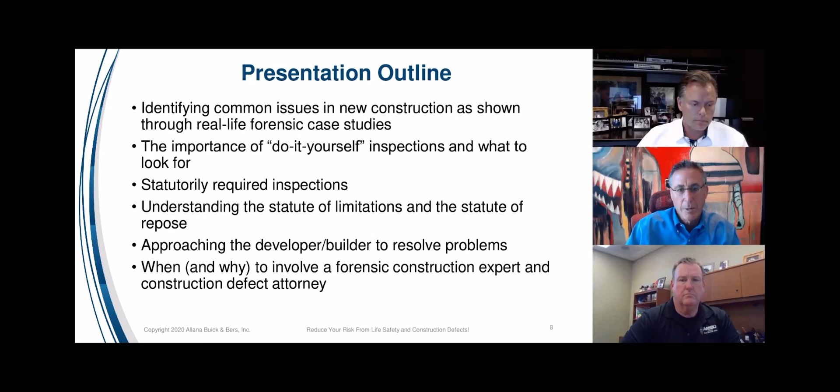Then we're going to talk a little bit about the statutorily required inspections in Arizona, and then also talk about the timeframes, statute of limitations, and statute of repose, the absolute cutoffs you have to bring claims if you find construction defects that develop, how to best approach developers or builders to resolve problems, and when is the best time in this cycle to involve someone like Gene or someone like our firm. So that's what we'll cover today.

Obviously it's taxpayers' money, and if these defects aren't addressed within the timeframes that you need to bring a claim, then you have a real potential of getting stuck with ongoing maintenance costs that you shouldn't have, and really make the project not as successful as it should have been. We'll talk a little bit about the 1-year express warranty that most contractors give, sometimes 2 years in their contract. And we'll also talk about the fact that in Arizona, you have up to 8 years to bring a claim for specific construction issues.

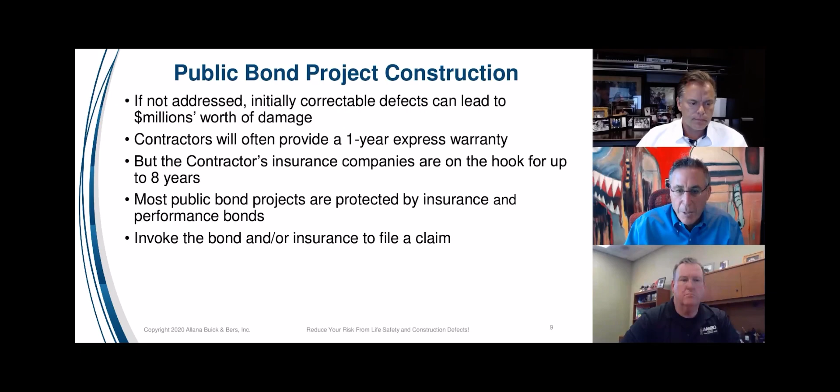And we'll also talk about the fact that most of these projects are covered by insurance and performance bonds, and what that covers and how you can bring claims to trigger that coverage. Because a lot of these guys have already taken their profit off the project, and if you're coming back 2 or 3 or 5 years later, where does the money come to fund these repairs? And often it comes from insurance products.

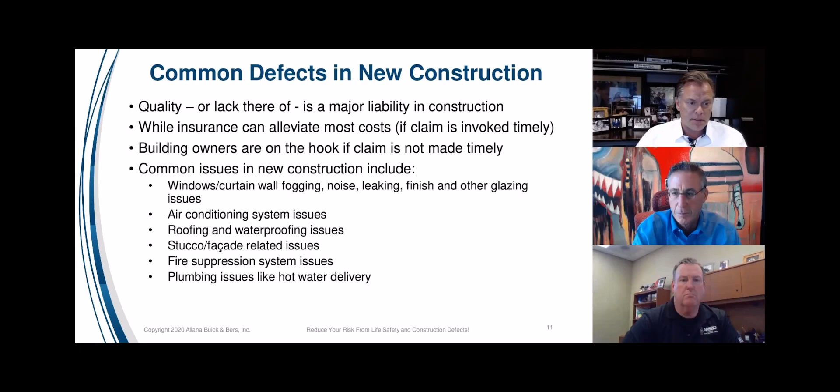The building is 3 stories on grade, slightly on a hill, with low slope roofing and HVAC equipment. The cladding consisted of stucco, with some ornamental tile work at the entry, plus curtain walls and storefront window assemblies. There's also a split slab waterproofing system—some courtyards on the building had topping slabs protecting waterproofing that also leaked.

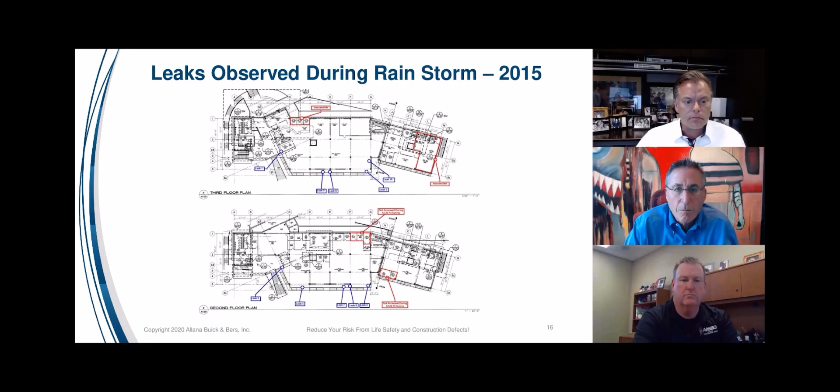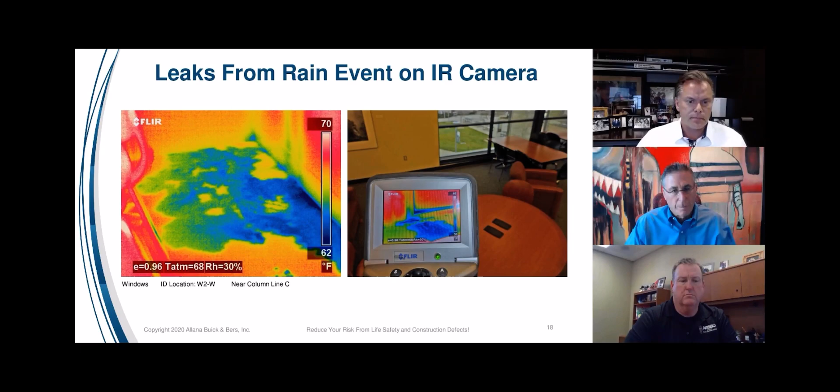And so what we have here is an infrared camera, and we took snapshots with the infrared camera to show the extent of water intrusion. And if you look to the left, you could see the blue outline, and that blue is a waterlogged, soaked carpet. And you could see that there's just a ton of water coming into the interior. And it's intruding upon the tables where the students are trying to study.

Another little tool or trick that we use to help show the water is using litmus paper. We all used that once upon a time in our chemistry class, and it changes color. And so when it gets wet, it turns a violet or a purple color. Of course, the maintenance staff had to take out their caution signs to point out that there's wet flooring and stay away from it. But you can see how wet the floor got.

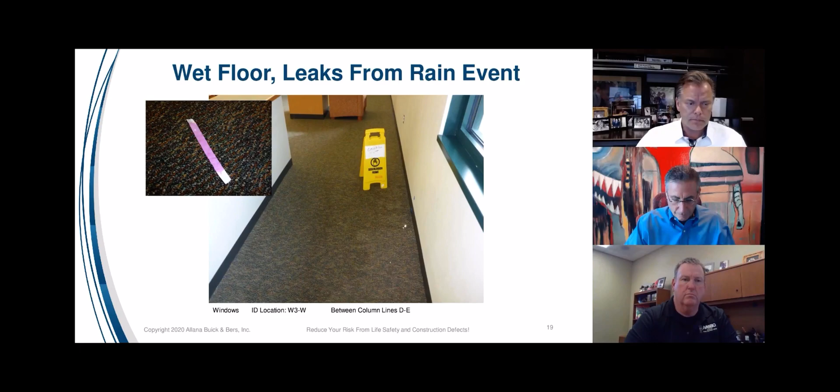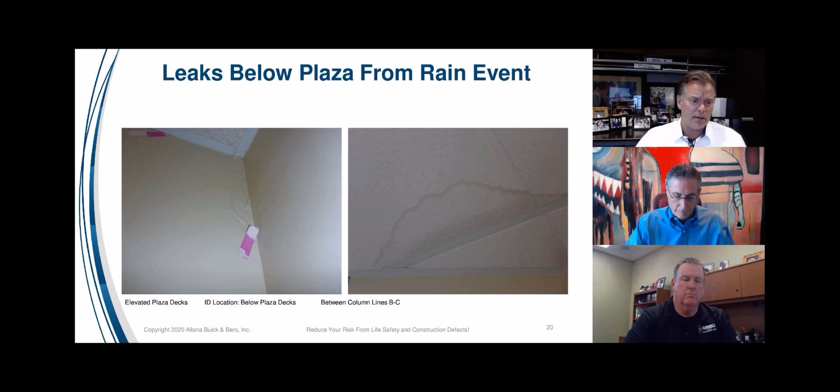Other defects that occurred as a result was damage to the paint and the drywall finishes. You could see the ceiling tiles, they were getting water stained. And this is a brand new building, very, very young, already experiencing such severe problems.

To help prove our case and to help the client during the litigation process, part of our protocol is actually to develop testing procedures and use equipment such as, in this case, a Retrotec negative air chamber and windblower system where we actually replicate negative pressure on the window system to do two things. One, to understand if the window assembly as installed was performing as designed and specified. And then two, we also wanted to replicate reported leakage.

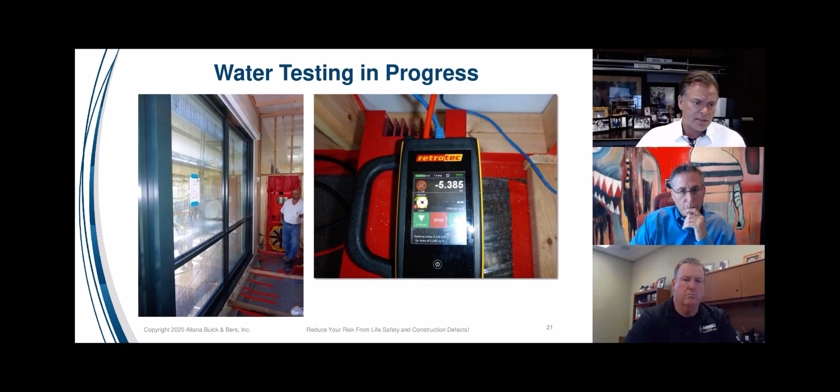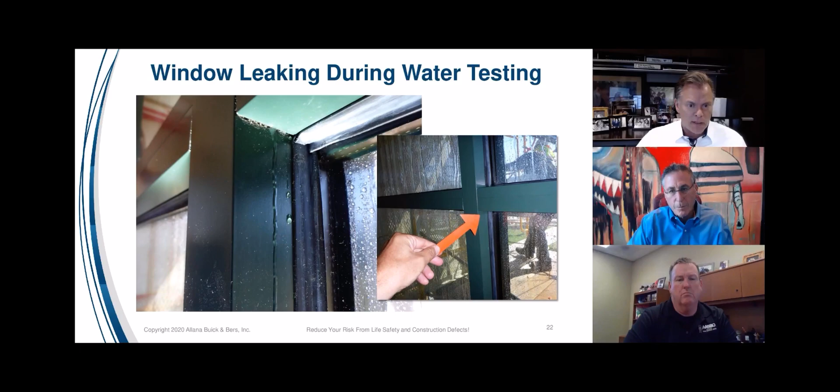And we've done both static test and then negative chamber testing. So with and without negative air chamber testing, and we got leaks in both instances. You could see here in the photos, we replicated leakage. You could see water streaming through the window, through the glazing pockets, through the framing members.

And I won't recite every bit of data, but we did create some exhaustive testing tables to help show the other side, the defense experts, what the results were when we tested it. Was it a window issue? Was there historical staining, whatnot? And what the results of the testing were.

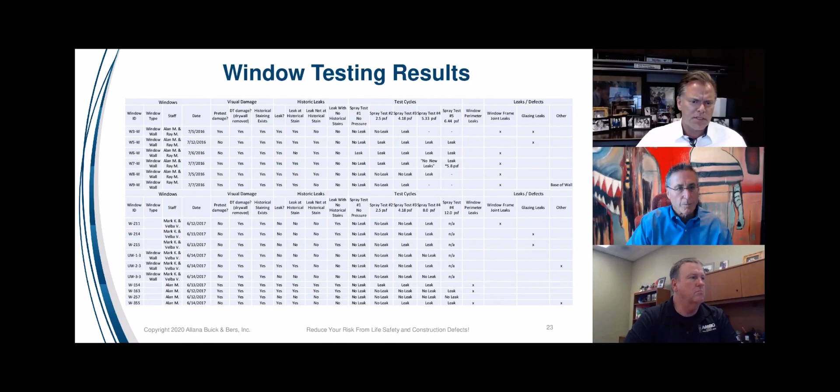In addition to the spray testing, we oftentimes complement the spray testing with some destructive testing. So basically what we do, like doctors, we perform biopsies on a building. And the purpose of that is to understand what the underlying condition of the building components are. How bad is the damage? What can we expect? Are there other potential problems underneath that we might miss otherwise without performing it?

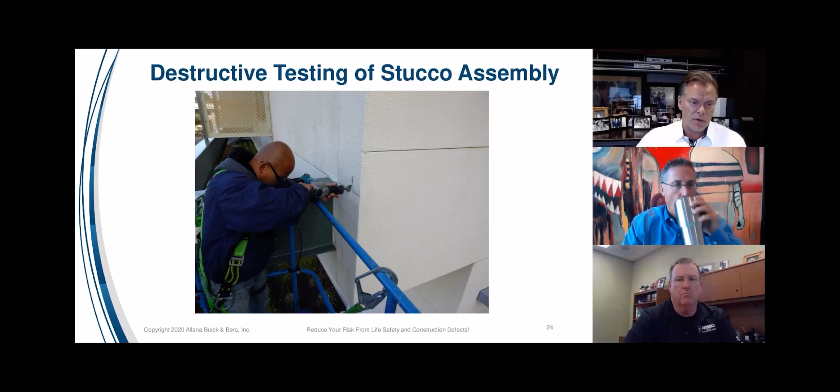So in this case, and I'd previously shown you there was large steel structures penetrating the building, we had these large beams that were supporting the shading system, the shading structure, and these beam penetrations weren't properly flashed. And the building, being only a couple years old, already experienced rust on the flashing.

So we have this weather-resistant barrier that's supposed to shed the water. Well, water got through it, through the flashing deficiencies, got behind it, and rusted out the flashing, and ultimately did damage the substrate. And the lath on top of that was really subjected to an excessive amount of moisture intrusion. There was a lot of cracks, and water got into the stucco and caused premature corrosion of the lath.

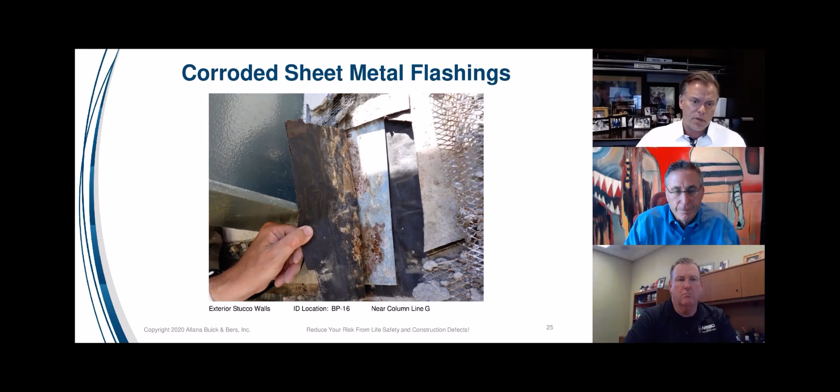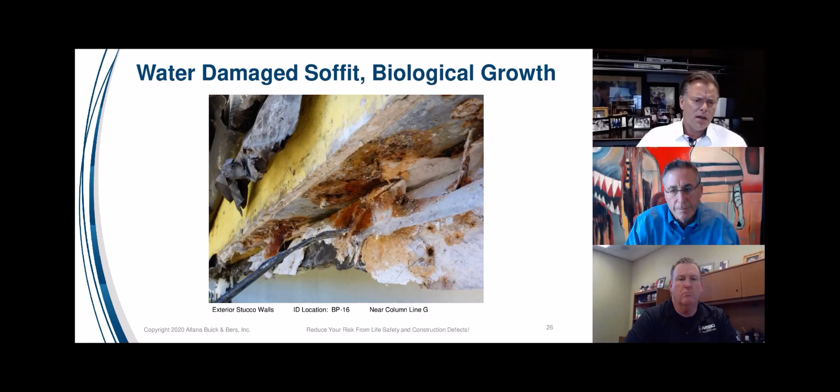Another defect that we saw, or damage that we saw, was when water did get through the stucco, it caused the sheathing to become fully saturated and rusted the framing, and also the sheathing was very soft and crumbly and needed to be replaced.

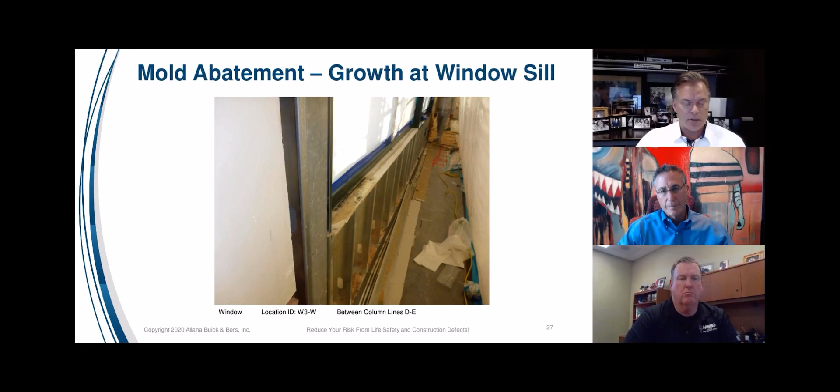One of the side effects of having leakage, unfortunately, is mold. And due to the leakage, there was mold on the sheathing that needed to be abated and removed. Special chambers were constructed on the interior to protect the students and the staff while we opened these things up during the course of our testing. Here's another example of some mold, again, all of which needed to be abated during the repair process.

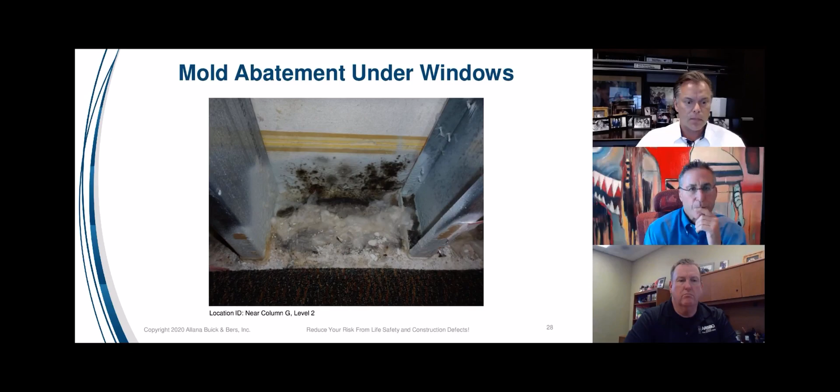Another defect we found during our investigation, in addition to the leaky windows and stucco penetration issues, was that the sunshade itself was improperly coated. The coating was too thin and it was rusting, so that needed to be addressed as well. We performed thickness readings on the metal and identified that as an additional defect no one really knew about until we got the scaffold up and looked at it closely.

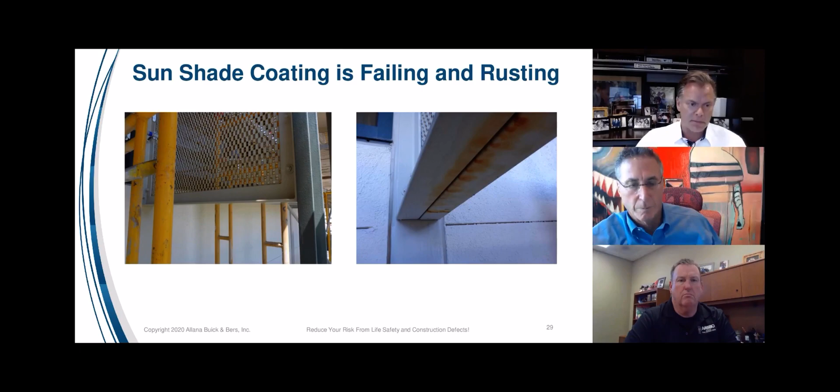During the course of this process, we have to prepare what's called the defect report. The defect report lists the defects, describes the deficiencies, and includes additional information explaining the defect in terms of code, non-compliant work. It describes deficiencies in terms of having deviated from the construction drawings, and also describes generally how we feel the building needs to be repaired. There were a lot of defects: improper sealant joints, self-adhered membranes improperly installed, and so on.

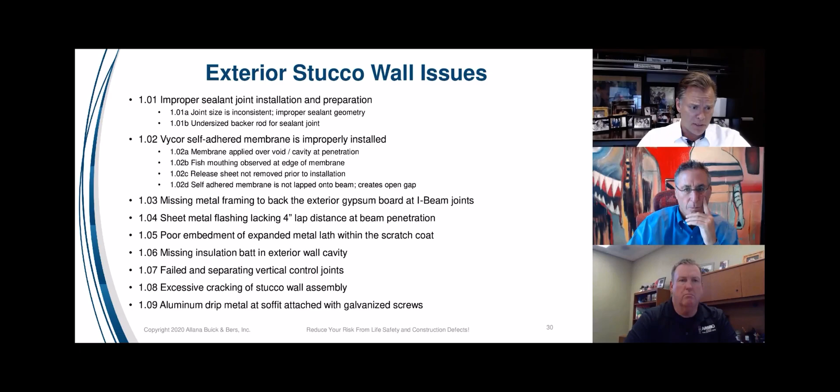Window issues: when we studied the windows, there was a confluence of deficiencies. Horizontal members not being sealed, resulting in leaks. Gaskets being undersized or unsealed at corners. The brake metal at the window jambs, the sheet metal that integrates to the window, was improperly sealed and improperly soldered. The windows weren't straight, so they were out of plumb. There were clogged weep holes. And anti-walk blocks—at one time you could actually insert a ruler through the glass and into the exterior. The glass moves thermally, and without these anti-walk blocks, it moves excessively. That's another deficiency that needed to be corrected.

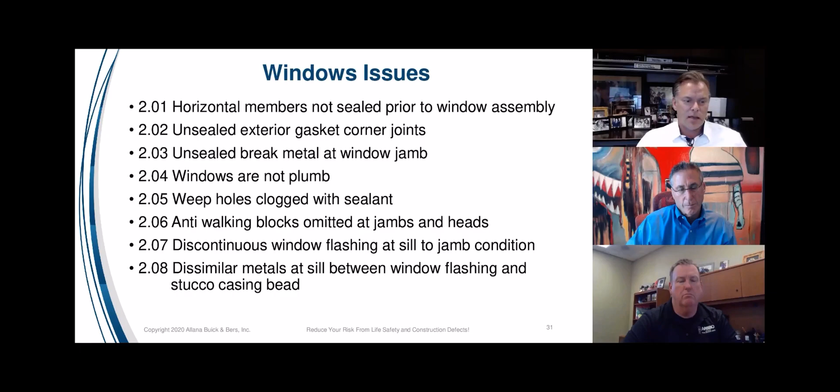In terms of the repair, during litigation, clients have two choices: wait for the case to settle—oftentimes they do have to wait because there's really no funding to fund the repair—or, as in this case, our client was fortunate enough to have enough funding to move forward with the repairs.

While we were litigating the project with the attorneys, we also developed construction documents that went out to public bid to repair the building. Based on our testing, we determined that 100% of the stucco needed to be replaced on the west and south elevations, and only in partial elevations at other locations, because the workmanship varied. In some cases it was better, some cases worse, but through our testing we were able to come up with a scope appropriate for the building.

We also designed replacements of window flashings and sealants and required other flashings to be repaired. I won't recite everything that took place for the window walls, but as you can see by these bullet points, there's a lot that needed to be included for the repair of the window wall assemblies.

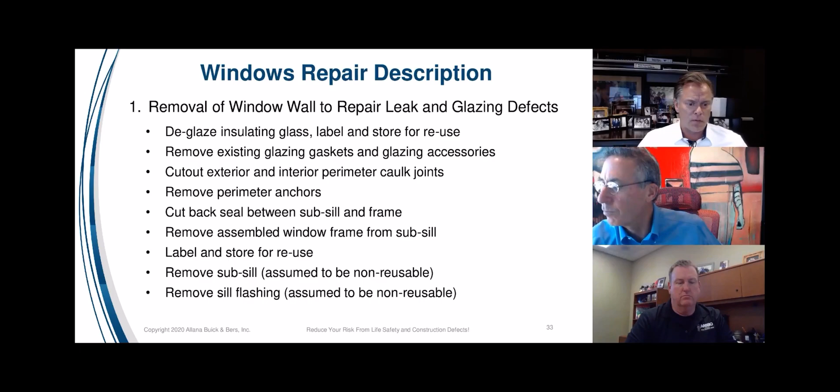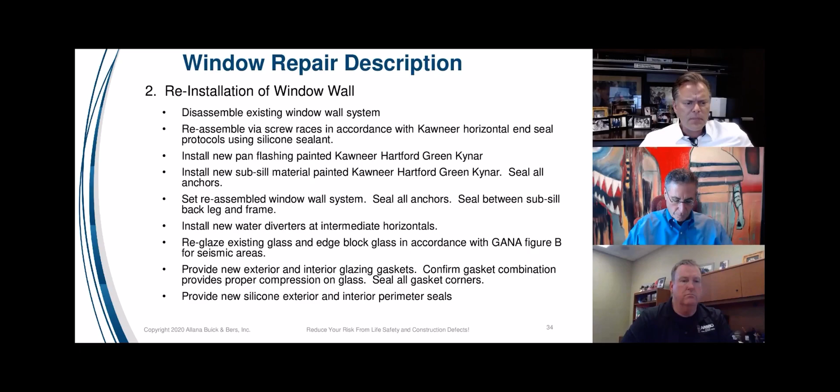In our case, we were able to salvage the window wall system. Generally it was in sound condition, but it needed to be rebuilt and reinstalled. So it got disassembled, resealed, repairs were performed to the glass, we put in the anti-walk blocks, and the exterior and interior gaskets were repaired as well.

The plaza deck assemblies were also problematic. As I described, the waterproofing only cost $10 to $15 a square foot, but to repair it cost well over $100 a square foot. The contractor had to remove and replace 100% of the topping slab, break stucco to integrate the flashings, and we also had to replace expansion joints that were leaking into the interior.

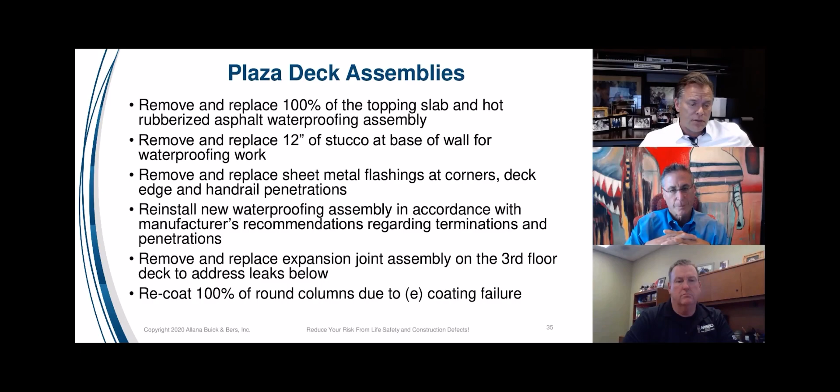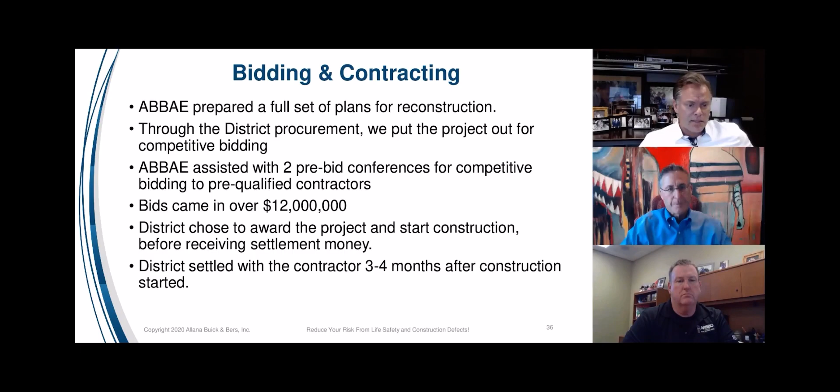We prepared a full set of drawings, which the client funded out of their own coffers during the litigation, and went back out to bid to contractors that understood how to repair a building of this complexity. Bids came in over $12 million. Shortly after the project award and start of construction, there was a settlement, and the client settled with the contractor, getting sufficient funding to help pay for the repairs.

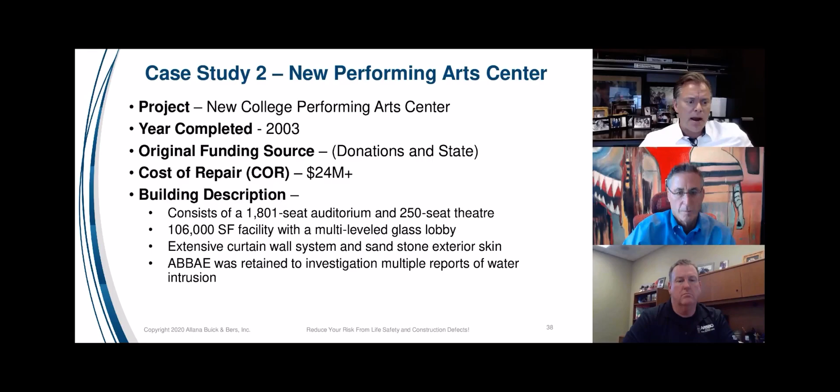So the building was completed around 2003. The cost of repair, though, was $24 million. So a lot of money spent to fix the issues on the building. It's a 106,000 square foot facility, multi-level, with an extensive curtain wall assembly, and we were hired to help investigate multiple leaks.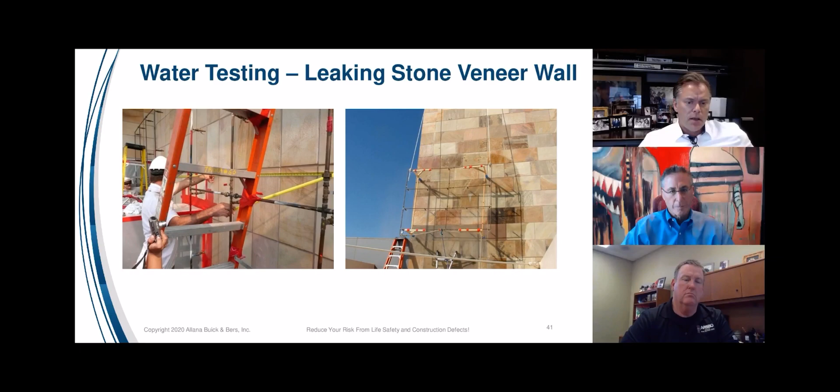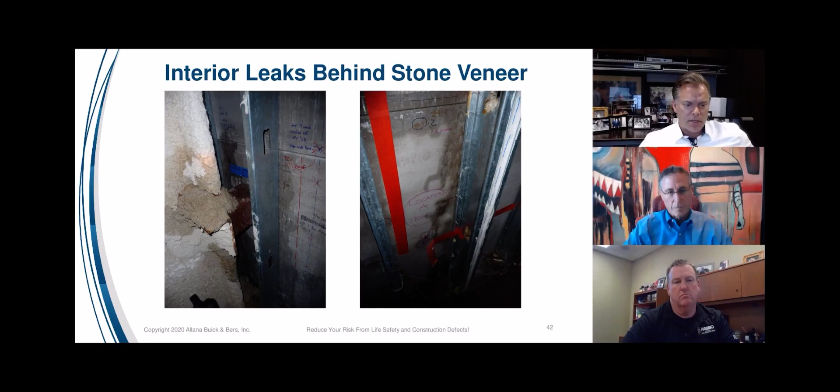After the reports of leakage, we were hired and had to perform testing to figure out what the contributing sources were, and there were many. We actually took spray racks and spray tested the stone assembly, and we were able to recreate leaks. On the interior, we had a contractor remove the drywall, and we saw water entering into the cavity and damage occurring. You could see the streaking, so very, very extensive leakage, for a building so young.

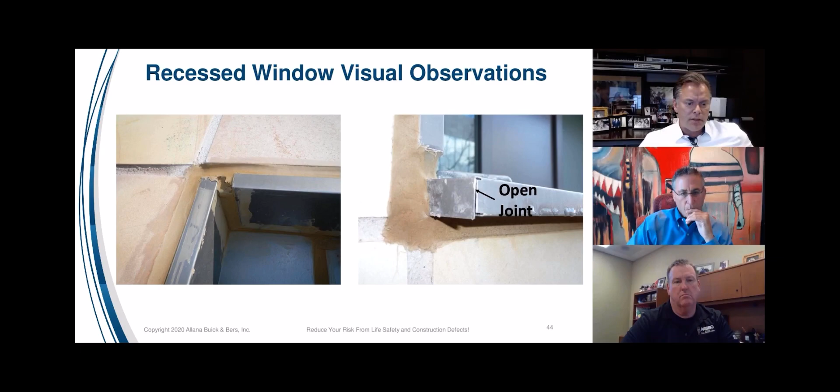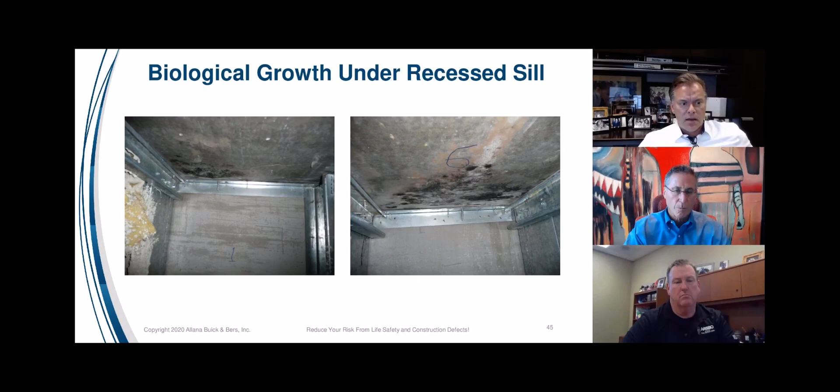The contributing sources included window flashings around the stone. Water got through grout joints in the stone itself and penetrated through a very thin waterproofing membrane. The membrane was almost paper thin, with cracks, splits, and voids, which unfortunately allowed water to enter through the stone and waterproofing barrier. The side effects of water intrusion, unfortunately, are mold. And here again, we have students and staff, so this needed to be quickly remediated and repaired.

Including the spray testing on the stone, we also destructively tested the stone around the windows to understand the failure modes. These biopsies are critical to understanding the extent of damage, but also understanding how and why the building failed. And it's instrumental in helping us develop repair solutions so that when repaired, it's done properly and addresses those deficiencies.

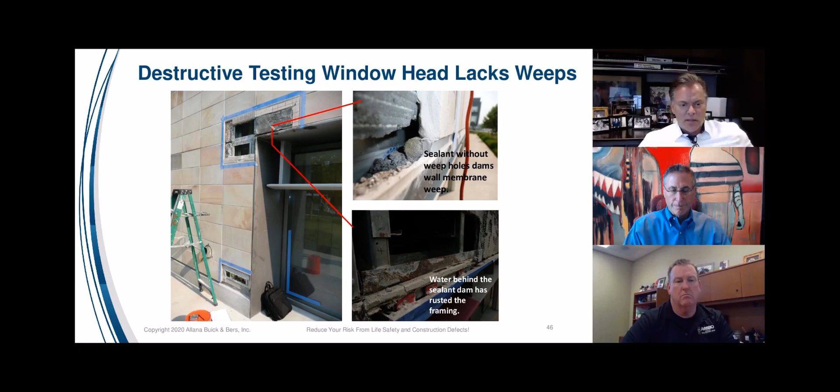One surprise we saw was a condition where water should have weeped out when it got to the stone on top of the window, and it didn't. It was because the weep holes were blocked, and the sealant didn't have weep holes. So there was a failure to recognize that if incidental water traveled through the stone, it needed to get out, and it couldn't. In this lower right-hand photo, when the water did build up, it rusted the framing out. It couldn't weep out, so all of that needed to be repaired.

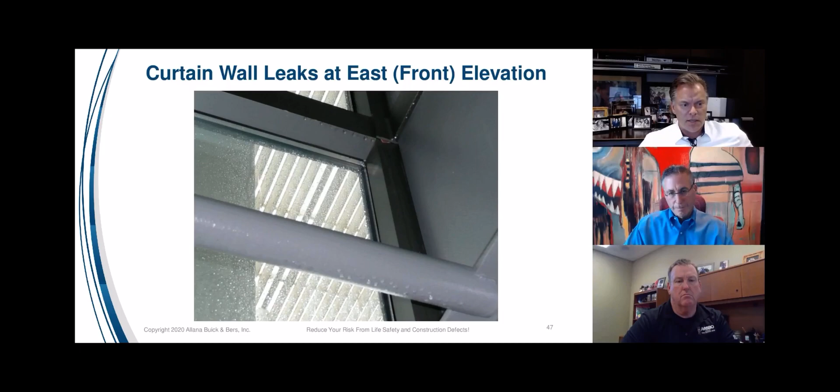Again, curtain wall leaks occurred through the flashings and through the curtain wall itself. Water testing replicated leaks, and you could see just how severe the leakage was. Water was just pooling on top and then flowing onto the flooring.

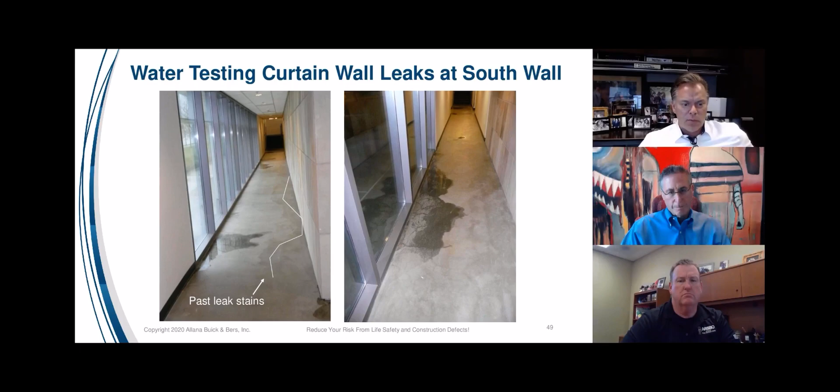Another issue was shrinkage cracks in the slab. There was a problem with the curtain wall assembly down at the ground level, issues with flashings, and water just got through the ground level.

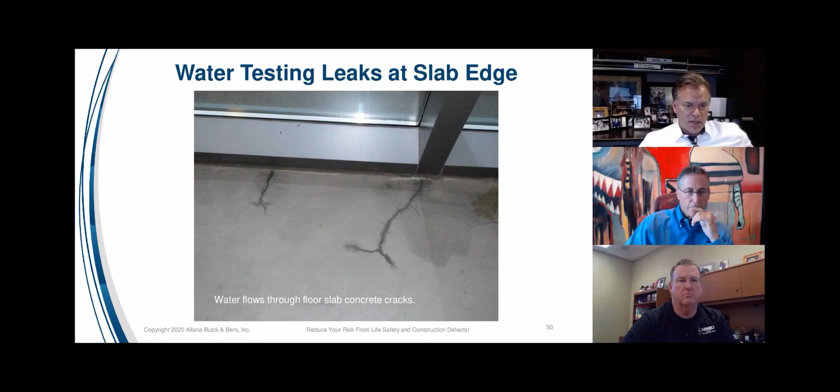So one thing I wanted to point out is the severity of leakage. We sampled and documented 167 leaks. That's a lot. We had to catalog them, indicate where they occurred, and eventually the case settled.

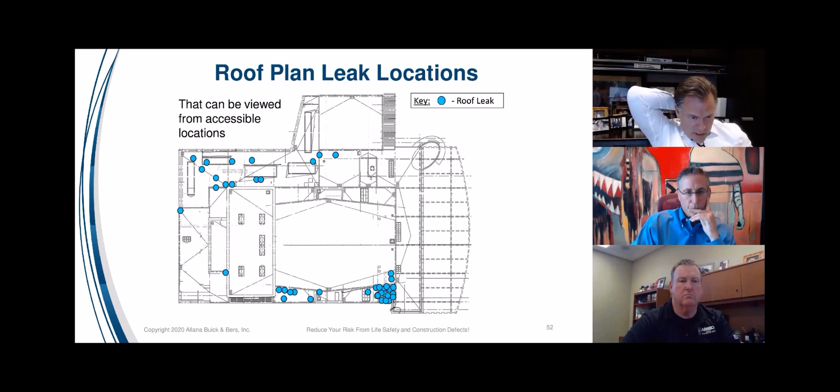We had to perform exhaustive leak maps on the roof plans as well. So it wasn't just the curtain wall, it wasn't just the stone, it was also the roof systems. We also prepared maps of where several of the curtain wall and wall leaks were occurring. All of this documentation helped prove our case and helped inform the defense as to how extensive these leaks were, and it was really important to work something out.

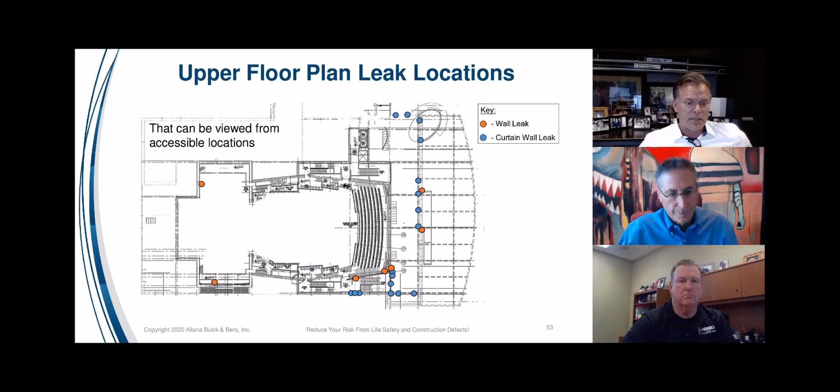So what was the resolution? The university pursued claims against the bonding company, and we prepared construction documents for the repair. Interestingly, in this case, the bonding company agreed to fund the repairs. And although this is probably a rare occurrence, the original general contractor agreed to fix the issues. Through the mediation process, there was an agreed upon repair scope, and the building is now repaired.

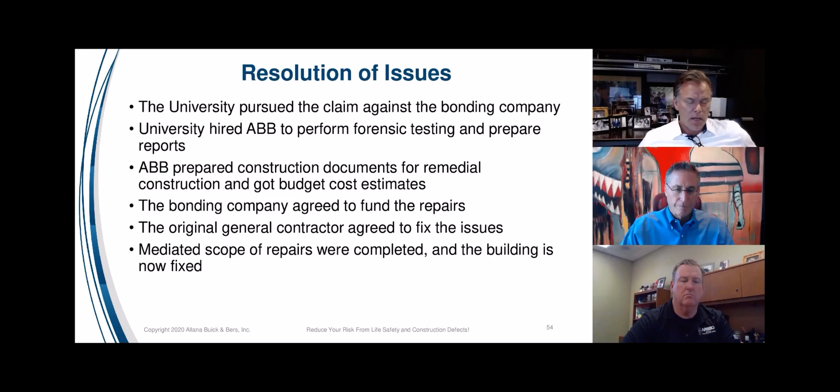So I've just gone through these two case studies. What I'm going to do right now is talk about the importance of being aware of your buildings, the importance of doing your own inspections. And with maintenance staff and facilities, you're always stretched thin, and it's sometimes difficult to keep tabs and track on issues. But when you do find an issue, there are methods of recording this information that are really helpful to the experts and the attorneys.

So let's talk about do-it-yourself inspections. Well, one, I'm preaching to the choir, but it's critical to regularly inspect your newly constructed buildings. Just because you have a brand new building doesn't mean there aren't problems. And so it's really critical, particularly with these statutes, that you do regular inspection and look for signs, cracking, leak issues. And you really do need to document it thoroughly, both on a micro and macro level.

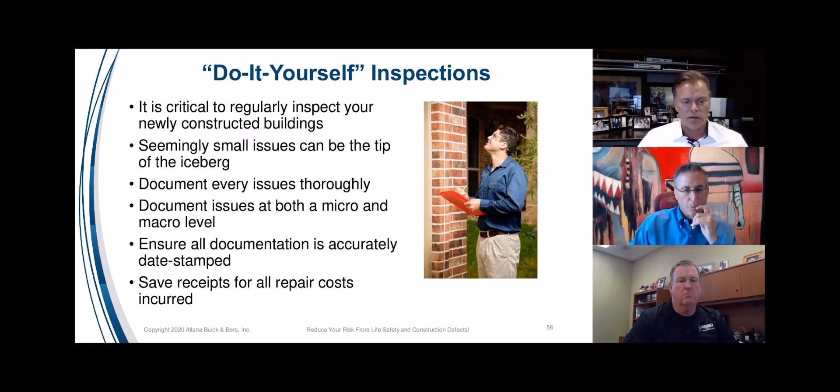We'll talk about that, meaning up close and away. Help understand what you feel the extent of the issues are. But we've got to accurately document it and date stamp it. Those dates are really important. And something that people overlook at times, save those receipts. In many instances, you can't afford to wait. You have to hire a waterproofer or a caulker to do an emergency repair. But record those costs, because oftentimes those are recoverable.

So again, photo documentation. In today's technology, we have our iPads and tablets and phones, and so we have a lot of opportunity to take photos and record that, and then catalog it and store it somewhere where it's accessible. So the important thing is, if let's say you have a window issue, take a big picture overview shot of the window, try and identify the areas on plans. And I've shown you examples of how we've shown leaks on plans through the use of annotation, putting in little blue dots or red dots.

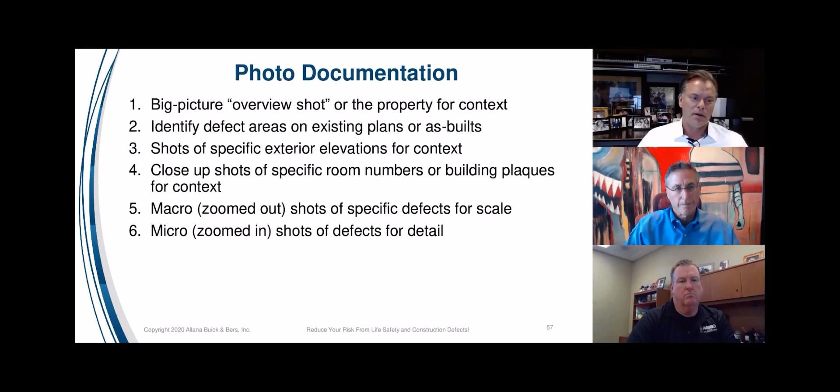Take close-up shots, identify the area location by taking photos of the room numbers or plaques, just to give some context for where the issues are. And again, take zoomed out photos and take zoomed in. And I can't tell you how many times we'll get a great shot of a photo up close, but we really don't have a good idea of where it's occurring. So take a deep breath, take a picture of where it's occurring, take a picture of the room number or unit number, zoom in and zoom out. So big picture, an overview shot.

If by some chance you do have a Google aerial photo, take those. These are really helpful. As much as plans are helpful, the aerial photo off of Google Earth or a similar software program is really helpful to us. Mark up a photo elevation or the elevation drawings themselves to indicate where these issues may be occurring. All of this plays into the big picture of being able to accurately document. Show the actual leak. It's helpful.

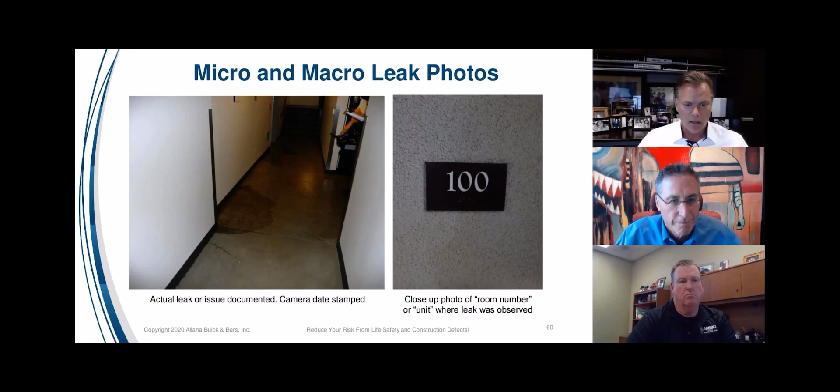I have some clients that actually will take videos. So if you have real live drippage, use that video camera, because that video is really instrumental in showing what the severity of leakage is. A photo speaks 1,000 words, but that video is worth tens of thousands of dollars. Again, here's a photo. Take a photo of the room number. Where did you see the leak?

There are industry guidelines that you can use to assess your building when you do this regular inspection, one of which is the ASTM E2018, a standard guide for property condition assessment. It's a pretty long document, but it gives you ideas of how to document, what to document. It describes what to review: the structural framing and enclosure, the roofing, the plumbing. It gets into ADA things. And so there are experts out there that do this for acquisitions. You can also do it for existing structures. But it's a nice guideline to review and be aware of.

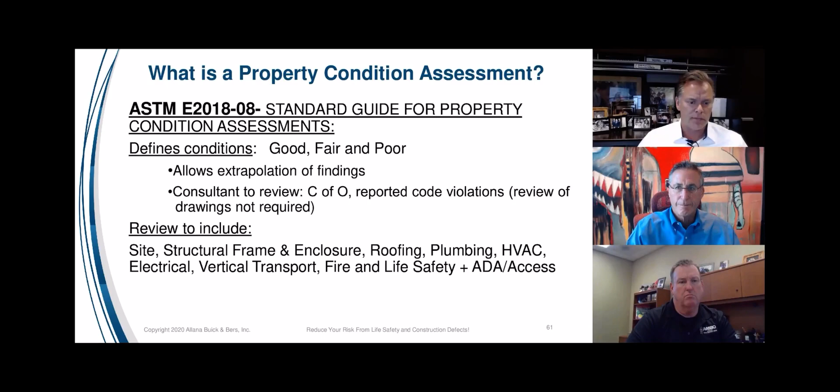What's the difference between a property condition assessment and a facility audit? With PCAs, you do include identification of construction defects, and also provide repair tables with cost. What's an immediate need that needs to be addressed? What should you be reserving? Facility audits also, though, include a good inventory and survey of the facility's equipment and assets. It gives a snapshot in time of how they're performing, how they look, and what their conditions are.

So bottom line is it's important to have good record-keeping practices of your facility and how they're performing. And when an issue arises, some thought does have to be put in as to how to address that issue. I can't tell you how many times an owner, over the course of 5, 7, 8 years, goes back and forth with a contractor and attempts to get a resolution, and the contractor offers a sealant repair and whatnot, and it drags on. And sometimes that dragging on without the help of an attorney or an expert can result in missing a statute and missing an opportunity to get some funding or an agreed upon repair scope to repair your building.

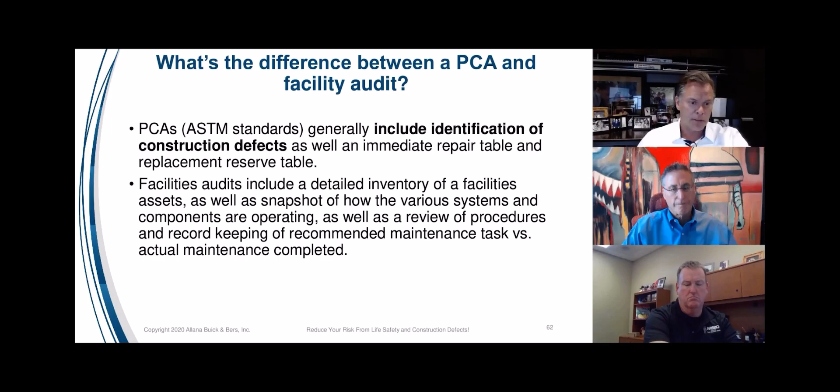So with that said, Richie, I'm going to pass it on to you. Hey, thanks, Gene. That was very informative.

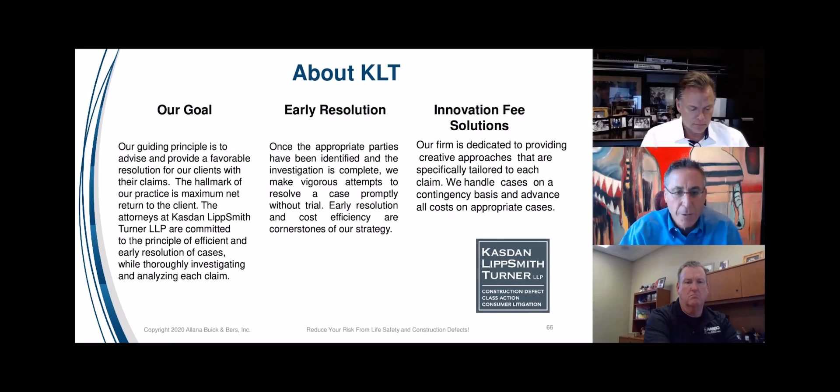Our firm, like I said, has offices throughout Arizona, New Mexico, Hawaii, and California. And we not only do school districts, we represent municipalities, and then we represent large apartment developments as well as high-rise and condos for homeowner associations.

There are a few statutes, and I know Robert and I have talked a little bit about this. First of all, it is statutorily required in Arizona that a school district develops a routine preventative maintenance program for its facilities. And obviously, if you're going to be developing a system, you're going to have to come up with some visual inspection program or regular facilities assessment program to be able to comply with that requirement.

The most important protocol that has to be regularly checked is a roof inspection protocol, and that has to be coordinated before any repair or replacement of any roof elements are done. And this one's required to be done by a registered structural engineer or some other professional like Gene with training and certification, not a roofing subcontractor, the way I read the statute. And Robert, has that been your experience with these type of inspections? Yes, you're correct. Okay, good.

Now, when we were preparing for this, Robert and I chatted for a bit. The school facilities board has a preventative maintenance guideline, and they are also required to go out and do random inspections. They're supposed to do 20 a year based on their statutory charter, but it looks like the last one they've done is 2017 or 18. So maybe they're just not funded enough to do those.

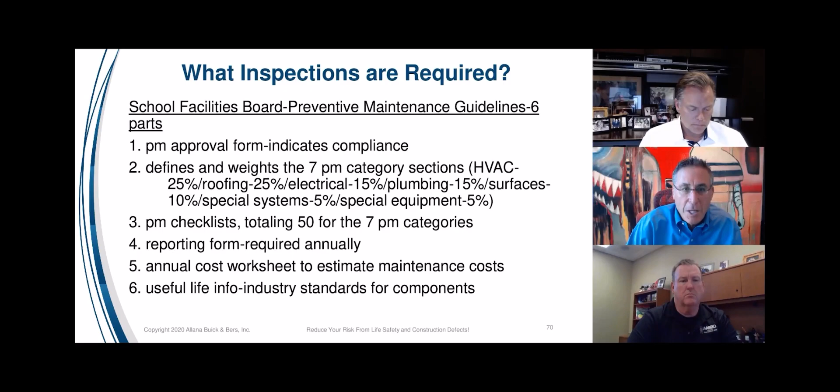So I want to talk a little bit, with the few minutes we have left, about the time frames to bring claims, because most of the time what we see in these claims is an express contractual warranty. You sign a contract with the general contractor, and the contract will provide a specific type of warranty. And Robert, are you getting 1 year or 2 years in those recent buildings you did? 2 years. So you get 2 years in express warranty. That's a contractual warranty that's provided via contract.

In Arizona, you have 6 years from the breach of contract to bring claims for faulty construction. So if you have your express warranty, you can bring claims on that, but then you also have a contractual warranty for the contract that's been done, and 6 years from the date when you knew or should have known. So that's the outside date to bring the claim for the breach.

Now, there's an implied warranty in Arizona as well, and there's been a lot of litigation. It's been in the Supreme Court twice about whether or not the implied warranty of habitability and fitness extends to commercial projects or governmental projects. And that implied warranty extends the express warranty to 6 years. So it would provide you 6 years to bring a claim for construction defects, even if the express warranty was only 2 years or 1 year by contract.

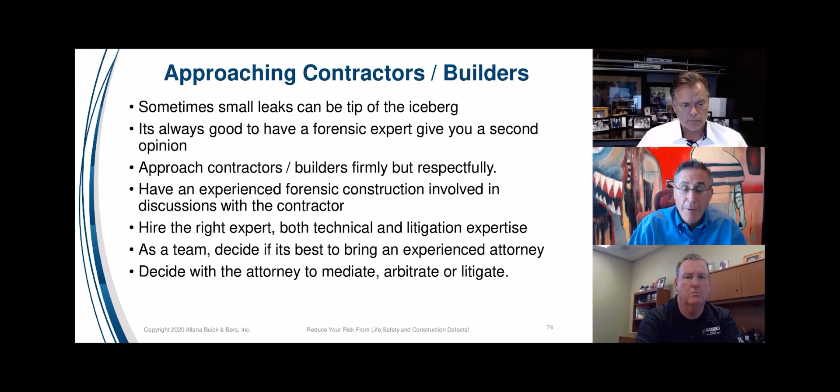When do you bring in someone like us? I think it's always good to start with an expert. We like to bring in the expert because the discovery is attorney-client privileged. But surely to figure out if you've got a case early on, especially before you're giving any kind of formal notice of a claim, it's always good to have your counsel involved. Construction defect litigation is a specialty. That's all we do, and it's very focused on construction related claims.

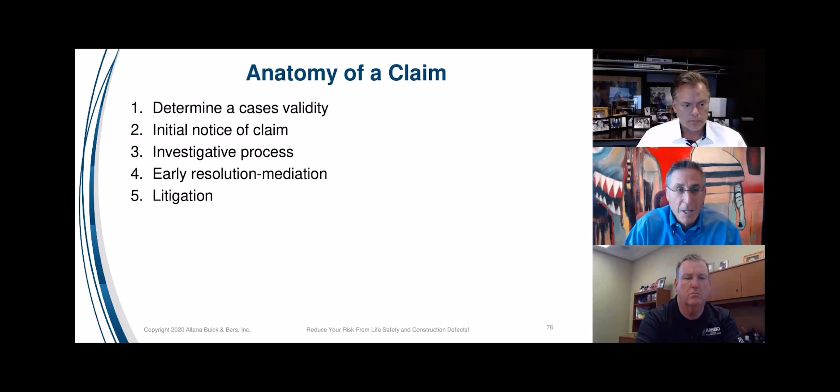And I think we're about running out of time, so maybe go 1 minute over. If you think you have a defective construction, your clock's ticking. Once you're put on notice that there's issues, water intrusion, cracking in your concrete, stucco, the clock is already ticking. The other side is going to argue that you're on notice that there's issues, especially if you're a facilities or project manager. If you're getting close to 6 years or 7 years old, get it inspected. Have a really good look at it, because at 8 years you're going to lose your claims.

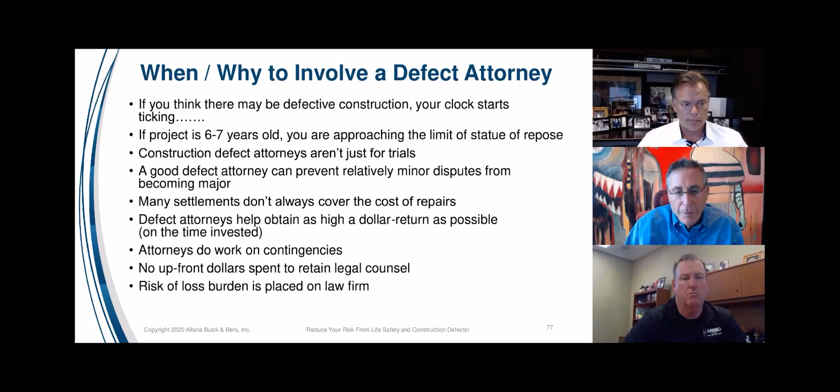Most attorneys that do work in this, at least our firm does, work on contingency. There's no upfront dollars for the district, and we advance all the costs. So any cost of recovery is pushed back on our firm, not on the district. So it's a good thing for the district as well as for the taxpayer. And just inspect your building regularly. Bring in outside experts to do it. Please, the more documentation you have, the better it is, and the easier it is for us to bring a claim. Know the deadlines of the claim, and bring in experts as soon as you can.

Robert, do you want to add anything before we ask any questions? Yeah, I just want to piggyback on what you gentlemen have already said. One thing too, if you're fortunate enough to build a new building, as the building's getting constructed, walk that building. Try to go through every aspect of it. Get onto the schedule. Know when your electrical is done. Know when your AC is getting done. Know when your roofing is getting done, and walk those items. Because even if you're not an expert, there's some stuff that you can actually point out. You're not going to solve everything, but you might be able to find some stuff.

In the last two buildings we built, my guys had walked, the AC guys and stuff, and we found some stuff that wasn't quite right, that you can get before you really start down the closeout document trail. And then piggybacking off what Eugene said, walk for preventive maintenance, because realistically, those little leaks turn into major problems. And if you can get those early in that warranty period, it's well documented at that point. So that way it gives these guys a chance, if we have a problem, to come back. And if we're documenting that and we're getting them when they're drips instead of full gushers, it really will help out in the long run to save the building and extend that life. So that's what I would recommend to any district.